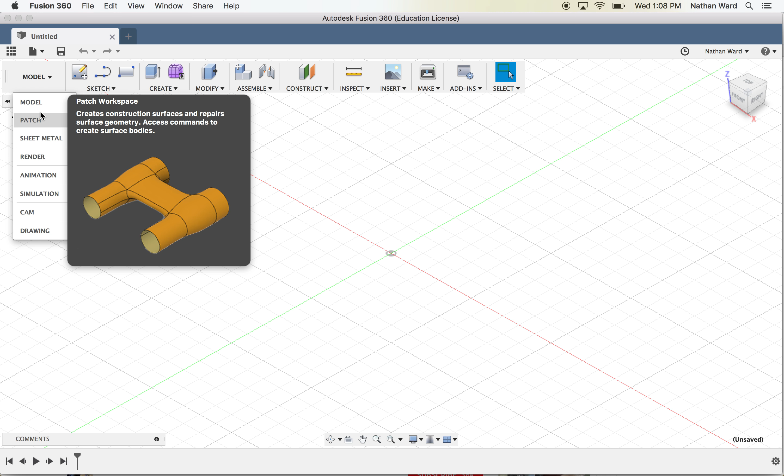Alright, so if you come up here to your environment, you're going to say, wait, I just enabled Mesh Workspace. Where is it? Well, it's not there yet. There's one more thing you have to do. So come up here to the very top where the component is. See, mine still says unsaved. And right click on that. If you scroll all the way down to the bottom, you want to click on Do Not Capture Design History. It's going to come up with this little message box for you.

Just click Continue. So the reason we want to turn off our design history is because we are going to be dealing with some big files with a lot of data, and it's just going to be too much for Fusion to deal with if it's capturing that design history. So now you'll notice that if we come back up here, we have a mesh environment. So we go to Mesh Environment, we click on Create, Insert Mesh.

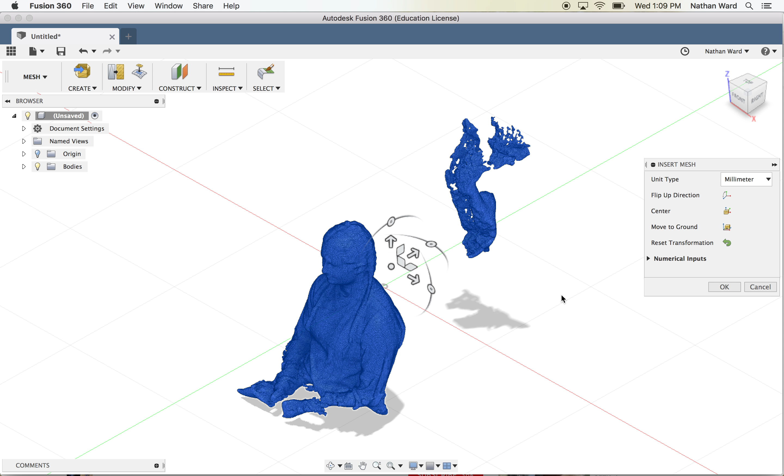Now you're going to open up where your thumb drive is and select your scan. Right? You don't need to wait till it necessarily opens there. And it's got a lot to think about, so it's going to pull that in. And there's my model. Now I'm not going to move it, I'm just going to leave it where it is. It's okay. So click OK. Now you can see that there's a lot of extra stuff here, and I'm sure yours has that too. And this one even captured something in the background. I don't know what that is, but we're going to deal with that.

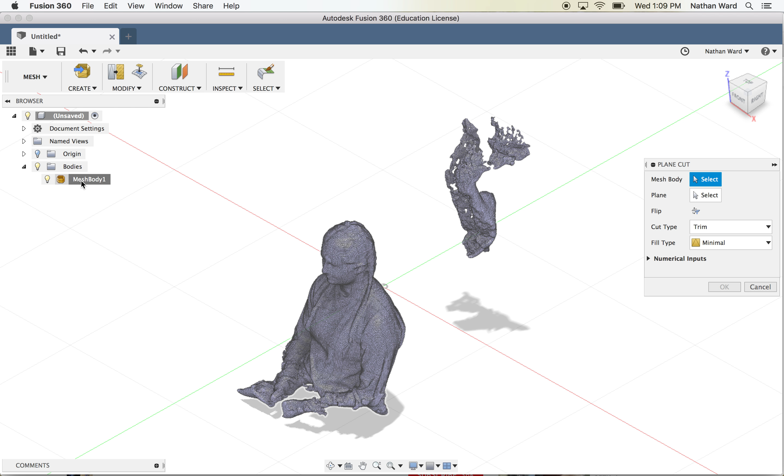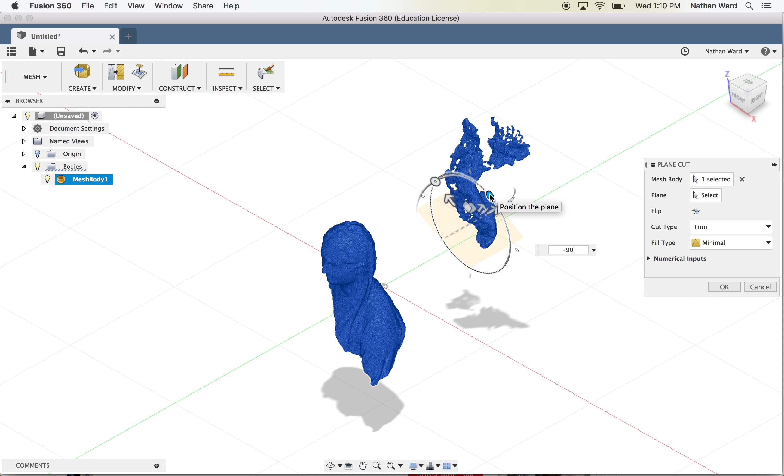Alright, so now that I'm in this environment, I'm going to come over here to Modify, and the first thing I'm going to do is I'm going to make a plane cut. Alright, so it's going to want to know what body to cut. I'm going to click on this mesh body. Now, see what happens? Let's not worry about that. So the first thing I want to do is I'm going to rotate this around, and this is going to take a second. I'm going to go ahead and just type in -90 degrees to get that plane all the way over flat. Now what you're going to see is it's a little bit high for me right now.

So I'm going to come over here to the front plane and I'm going to adjust this down. Now it's going to be a little frustrating because it's not going to respond right away. Okay, so I'm going to slide that down. And what I'm looking for is I want to get an appropriate amount of shoulders in this. And you're just going to have to work kind of intuitively here because it's not going to respond to you every time you do it. You'll think about it and it'll come down. So I like that. And what I like about that is I can see this braid that came down here, and I can see that it ends, but I'm not much below the shoulder. So I like that. That looks good.

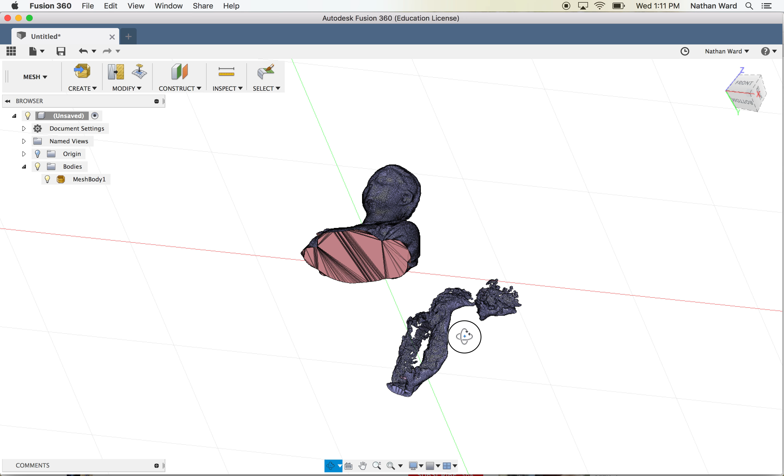Now over here in my cut, it's going to probably default to trim, but I believe that yours is probably going to default to no fill in this fill type. We want to go with minimal for that. And what that's going to do is that's going to fill in the bottom of this. So let's go ahead and click OK. Let it think for a minute. Alright, so now you can see that the bottom of my head has been filled in.

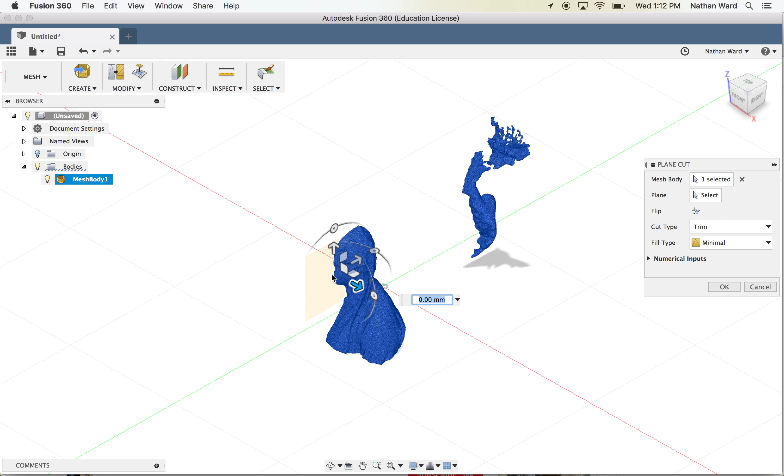But you're like, but wait, Mr. Ward, what about that ugliness back there? Well, let's go back and do Modify, and let's do another plane cut. Alright, so we're going to do same body. Alright, but this time let's rotate it around this way.

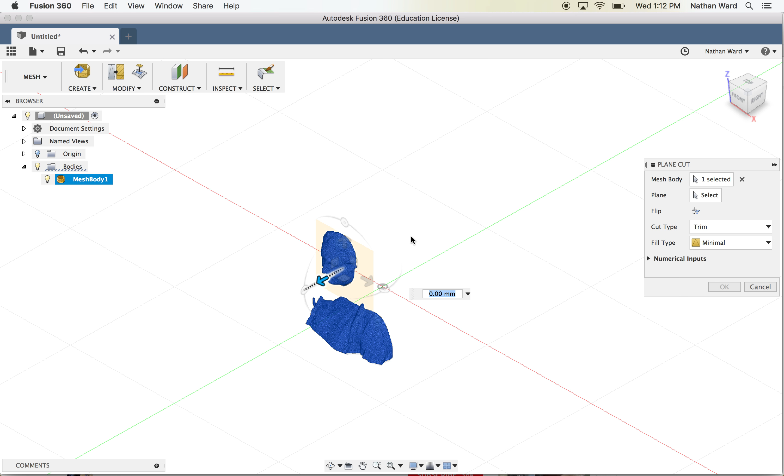Make it -90. Alright, and now let's push it through this way. And go a little bit further. And you'll notice that it's leaving that head behind.

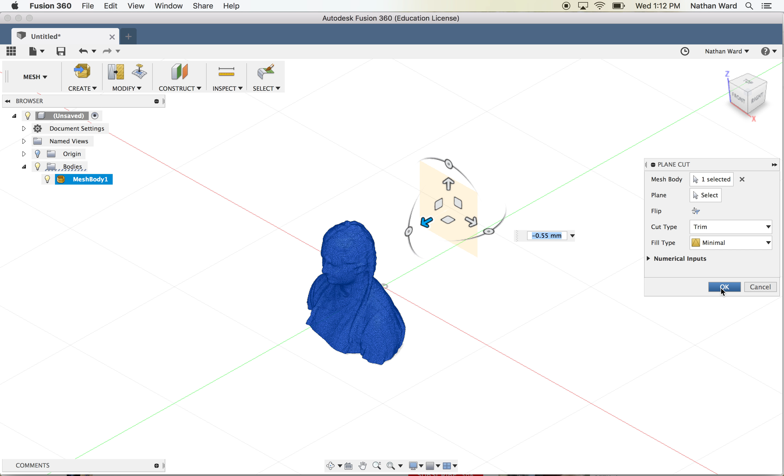All right. So there's that ugliness. So I'm going to pull it forward till that ugliness is gone. And now it is. And I really don't care about the fill type. I'm just trying to get rid of that. And there we go. Now, I could have tried to select and delete that part, but sometimes that just doesn't always work.

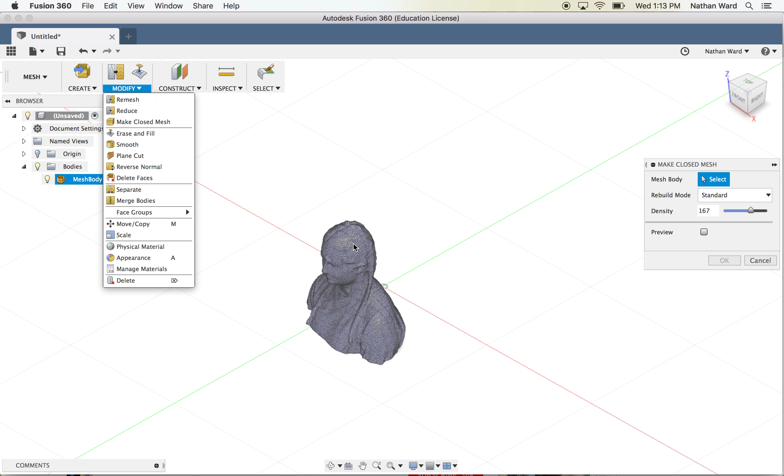All right, so one more thing I want to do before I leave the mesh environment is I just want to make sure that I have a closed mesh. So under Modify, third one down is Make Closed Mesh. I'm going to select my body. I'm going to leave all of this alone here, and I'm just going to click OK.

And what that's doing is Fusion's scanning my figure here, looking for any holes in the mesh, and will automatically fill them in. Now you'll notice I have two meshes, but it's mesh 2 that I want to keep. Okay, so we're going to go with that. Just know that you have that second one there.

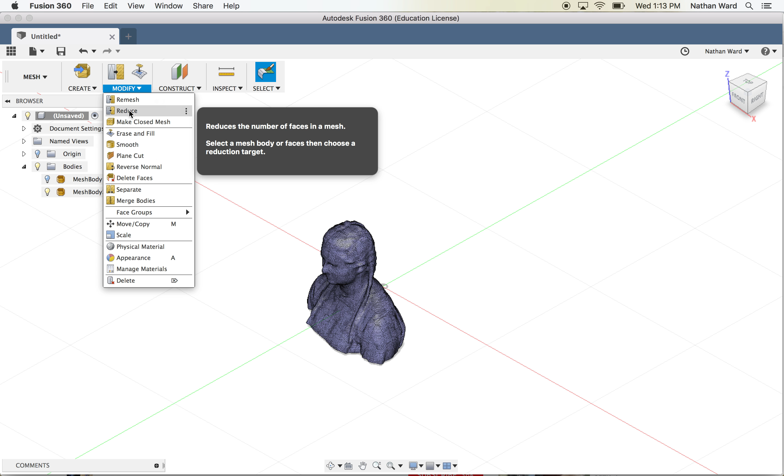And one more thing to do is Fusion can only deal with this stuff if we reduce the number of faces. And what faces are is if you zoom way in here, you can see that you have a lot of little triangles that are making up that mesh. And that's great for detail, but it means a lot of work for Fusion.

Now you probably started off somewhere around 0.2, something like that. We're going to go down to right around 0.05, somewhere in that range. Now mine, I've done this a few times, so it was already at that level. If yours isn't, 0.057 is good. We want to go adaptive because we don't want uniform. We don't want all those triangles to be the same size. We want smaller ones where we want more detail and bigger ones where we want less detail.

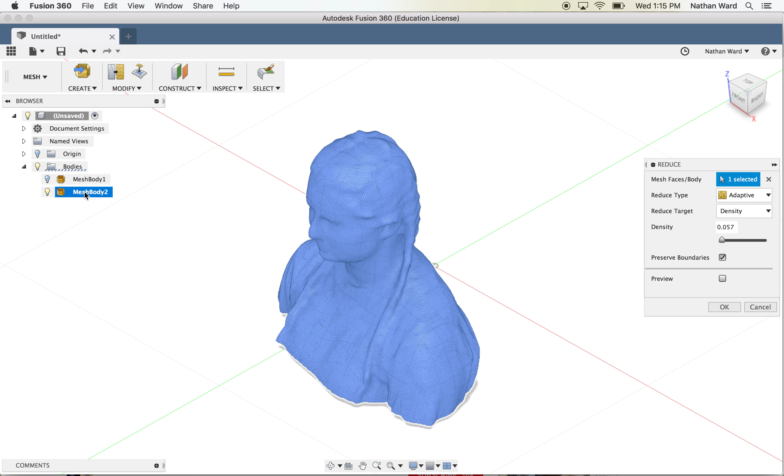And density is fine because of the way we're doing this. Now we could do by face count, where we could type in an amount that we wanted, but I'm just going to stay with density. Go 0.057. I've got my preserve boundaries box checked. I need to tell it what I'm reducing, which is mesh body 2, remember from before, and then click OK.

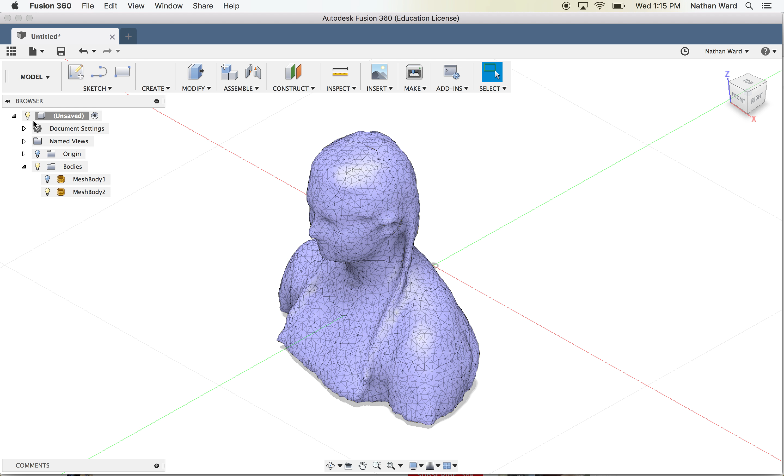Fusion's going to have to think for a little while, and what you see is you didn't really lose a lot of detail, but it definitely simplified the amount of data that Fusion has to think about. All right, so now that I've got that, I'm going to go back up here to change my environment back to model environment. And now if I go to Modify and I scroll down nearly to the bottom to Mesh, I'm going to go Mesh to BREP.

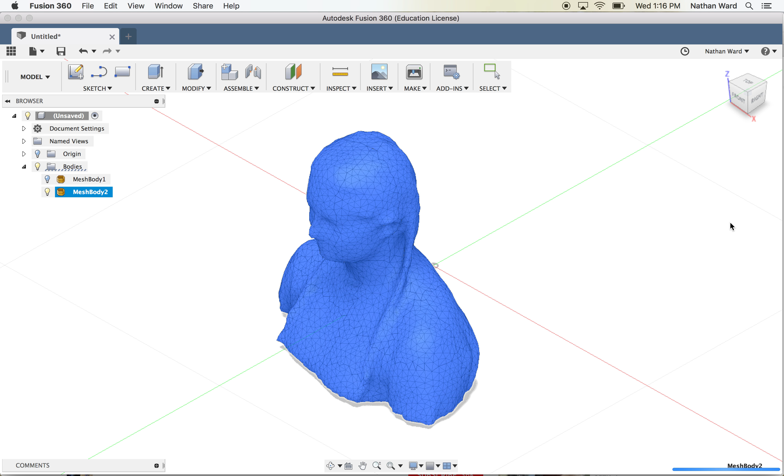Again, it wants to know what body I'm talking about, that body. I want my operation to be a new body, and then click OK. When that's done thinking, what you should get is another new body over here with a little bit of a different symbol on the side here. And now I can either go to this body and right click and save as STL, and I can select it

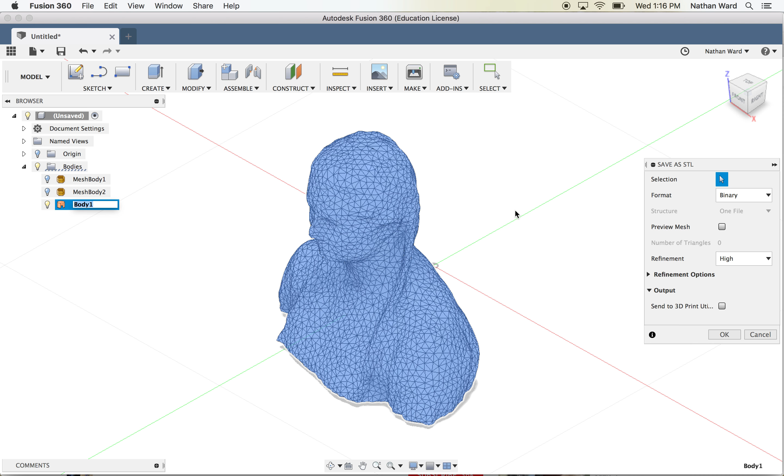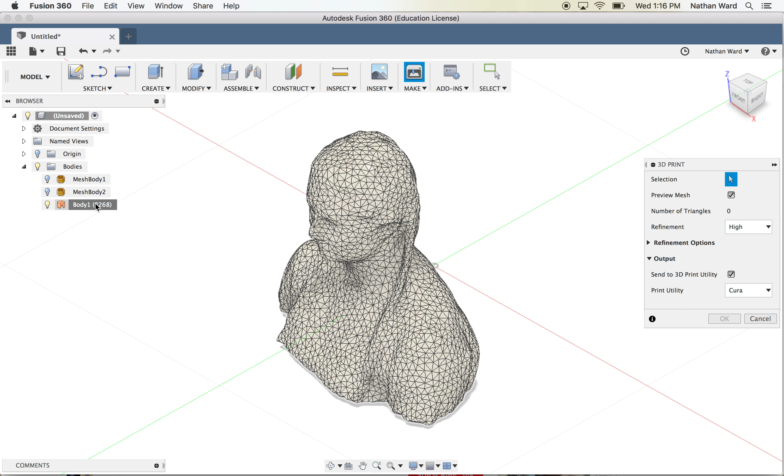or I can come up here to Make 3D Print, select this body, let it think about it. All right, and I'm not going to import it to Cura. I'm just going to save it, and now it's going to ask me where to save it.